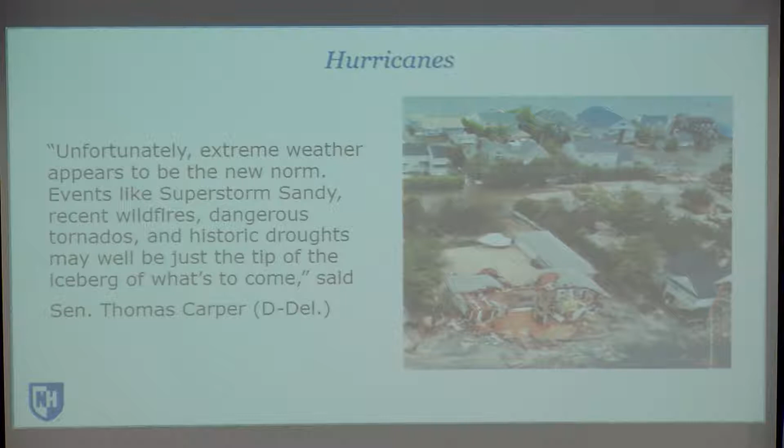Hurricanes, not something that in Costa Rica you've had to deal with, but most recently you've had a hurricane that hit the northern part of the country. We're seeing more frequent hurricanes, higher intensity hurricanes. So as a community, in terms of dealing with these extreme events, we're going to need to start thinking more about how we handle these. How do we build in resiliency to our infrastructure system so we can recover quickly after these types of events? And it's not just on the high temperature side, also on the low temperature side, especially in areas of the country where we don't necessarily see a lot of snow or cold temperatures.

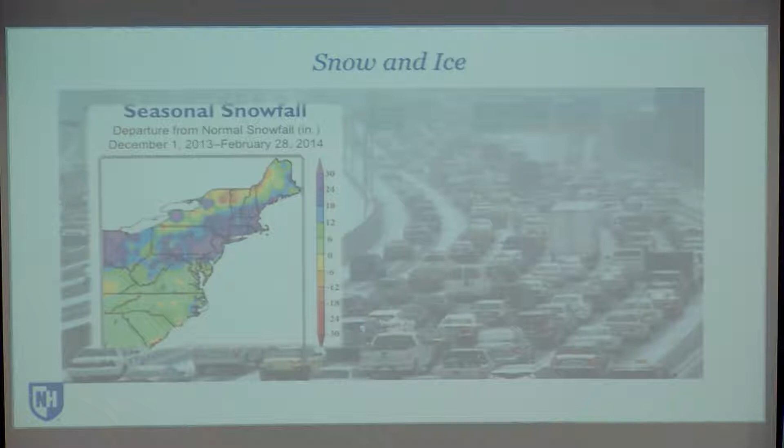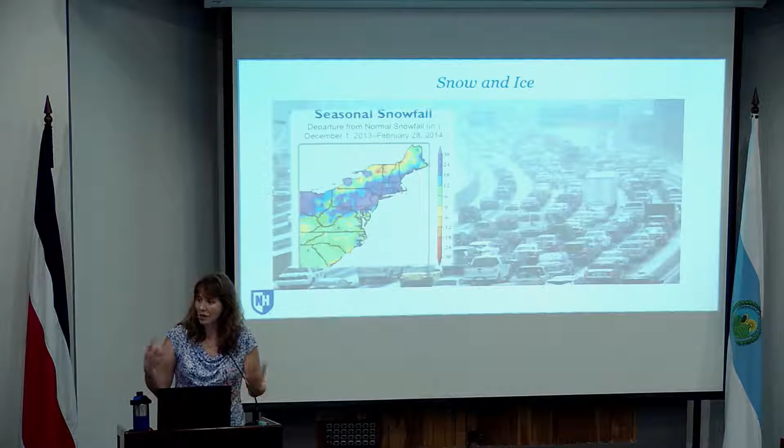There's been examples in recent years, like Atlanta, where they just didn't have a good way of handling emergency response to a big ice storm. In New England, we deal a lot with snow, we can handle snow. But a couple years ago, we had average snowfalls over 3 feet, more than what we're normally used to handling. So while we can handle large storms, having large storms one after the other was something we couldn't handle. It was very difficult to deal with. So it's not just specific one-time events, sometimes it's those smaller repeated events that start to add up, and you need to figure out what strategies to use to deal with those.

In terms of precipitation, a lot of areas in the United States we're seeing not just overall increases in the amount of precipitation, but we're getting roughly the same amount annually, just in more frequent, shorter duration storms. So we're seeing heavier, more frequent events. That leads to a lot of different types of challenges in terms of dealing with stormwater and flooding. And a lot of areas around the world are dealing with similar challenges. You can see, on a yearly basis, lots of examples of record flooding or unexpected flooding happening around the world.

And again, as infrastructure engineers, we've got to figure out how we're going to deal with this. How do you design your infrastructure to handle these types of events and to recover from them? And how do you do that? How do you figure out the adaptation?

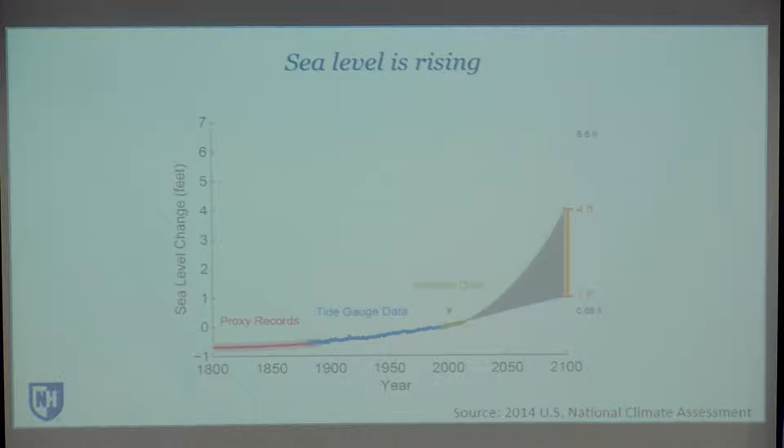So that's in terms of weather, but then we've also got the challenge, especially in coastal areas, of rising sea levels. This is showing some data for the New England coastline in terms of how sea levels have been measured to be changing over time. You can see proxy records, tidal gauge data from the last a little over 100 years, satellite data from more recently, and then the projected sea level ranges. Those projections have a range based on different types of emission scenarios and what we think might be happening as we continue into the future. For coastal New England, they've been projecting somewhere 1 to 4 feet of sea level rise by the end of the century, with a high of 6.6 feet.

Just recently, they've been talking about how conservative those numbers actually are, and it could be 10 or more feet that we could be seeing by the end of the century. Okay, so significant changes that we need to start dealing with.

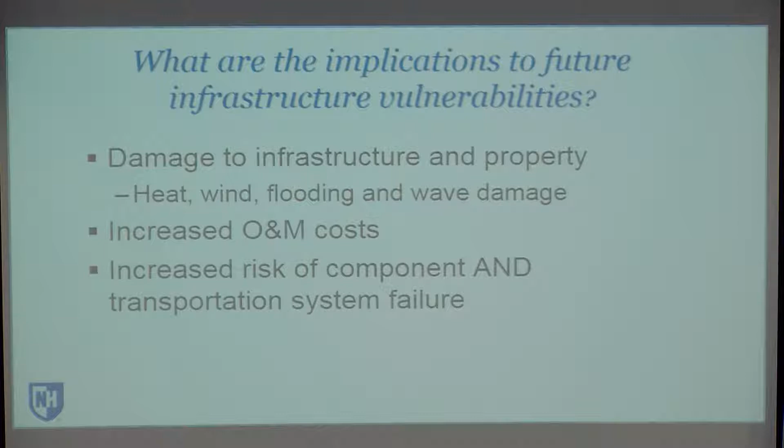So in terms of the implications to future infrastructure, really we're looking at damage to those infrastructure components from the heat, from wind, from flooding, wave damage when you're talking about the coast. In terms of overall day-to-day changes, expecting increased operation and maintenance costs, and an overall increase of not just component failure, but system failure. Being able to build in those redundancies, come at it with an adaptation approach, a holistic look at making sure we're preparing and being flexible for what future conditions could be.

So in that respect, at UNH, we've been working to try to get folks around this idea. About 6 years ago, we formed the Infrastructure and Climate Network, or ICNet. This is a collaborative network of over 75 climate scientists and transportation engineers in the Northeast. We've brought together engineers, scientists, and agency folks from the region to look at what challenges we're facing and how we deal with this problem. And it's not just about infrastructure engineers being able to adapt to certain climate information, but really understanding what is the variability, what's the uncertainty in some of those climate projections, and how we should best use them in the engineering design.

And on the flip side, getting the climate scientists to understand what it is that engineers use or need from the climate output. There's been a lot of communication, a lot of networking, and really what we've been able to do is accelerate new research and adaptation in climate change impacts across the Northeast with respect to transportation infrastructure. So that's the network side of things.

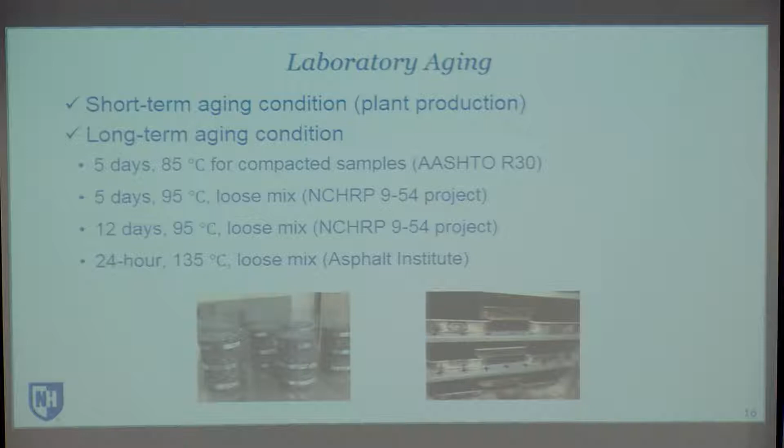We also looked at 24 hours, 135 degrees aging on the loose mix coming out of Asphalt Institute recommendations. So we wanted to evaluate these different approaches to see if there's similarities or differences in terms of the properties we're measuring.

In terms of testing conducted, we're looking at both binder testing and mixture testing. Most of the binder testing was extracted and recovered from the mixtures. In cases where we were able to get the tank material from the plant, we also did testing on the tank asphalt, mostly looking at PG grading, going through the typical PG grading protocol with the DSR and bending beam rheometer. More recently, we've been using the 4mm DSR protocol to fully characterize the material over a wide range of temperatures without having to do BBR testing.

For mixture testing, we're looking at complex modulus to establish the viscoelastic or rheological properties of the material, and also the simplified viscoelastic continuum damage approach for direct tension cyclic fatigue testing, the disc-shaped compact tension test for low temperature fracture, and the semicircular bend test for intermediate temperature fracture parameters. We're focusing on cracking because that's the primary concern in New Hampshire.

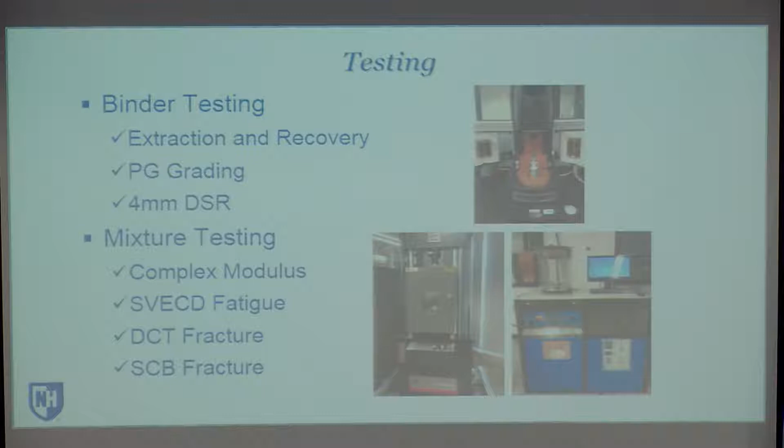A little bit more detail on the binder testing. PG grading, I think everybody's familiar with. The other parameter that we've been looking at for the binder side of things is the delta TCR value.

It's the difference in the temperature at which it meets the BBR stiffness criteria of 300 megapascal and the temperature at which the material meets the low temperature slope, or M value, which is 0.3. So the difference between those two temperatures has been established through the literature from work done at Asphalt Institute, that if that value is

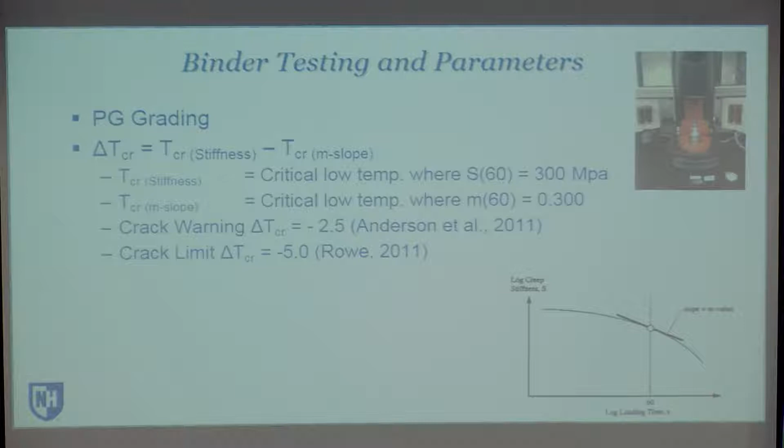above negative 2.5, that's an indication that there might be concern for some cracking. If it's above negative 5, that's more of a warning limit. So we're using those relative thresholds to evaluate the different binders.

It's really looking at this parameter, looking at the stiffness versus the relaxation capacity. And as that delta TCR becomes more negative, really what that's indicating is you're losing the relaxation capacity, which means you're more prone to cracking.

In terms of the mixture testing parameters, for complex modulus, again, similar to complex modulus for binders, we're looking at stiffness and phase angle.

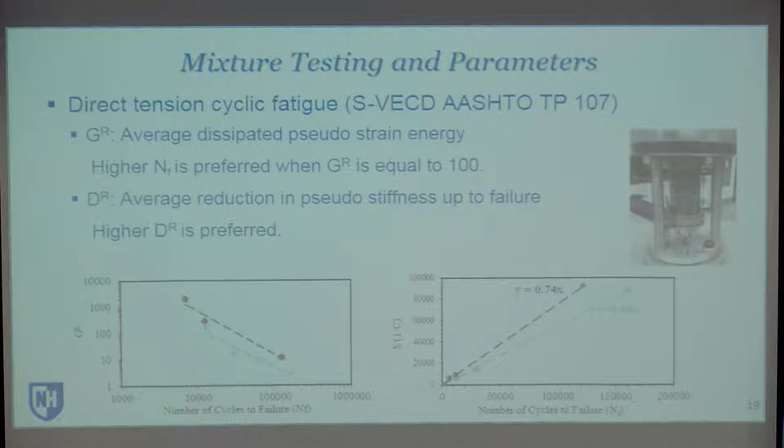And then for the direct tension cyclic fatigue, for the S-VECD approach, there's a couple different parameters that we're looking at. One is the average dissipated pseudostrain energy and looking at how that's changing with the number of cycles to failure. And then more recently, we've moved to the newer protocol or newer parameter that they've identified, which is the average reduction in pseudostiffness up to failure.

So if you're looking at the GR parameter, a higher number of cycles to failure at a GR value of 100 is preferred. And for the DR parameter, just remember that the higher that DR value is, the more resistant your material is predicted to be to cracking.

For the disc-shaped compact tension test, we're following the standard protocols, the ASTM standard, and the testing is done at 10 degrees above the low temperature at which the material is expected to be placed in the field. So that test is conducted at different temperatures depending on the location that the material is going to be in the field.

And the parameter that we're looking at there is what's called the fracture strain tolerance. The fracture strain tolerance takes the work, basically the area under your curve. If you look at the load displacement curve, which is then normalized by your fracture surface area, and then that normalizes that value by the fracture strength, looking at that peak value that you're seeing in terms of the load.

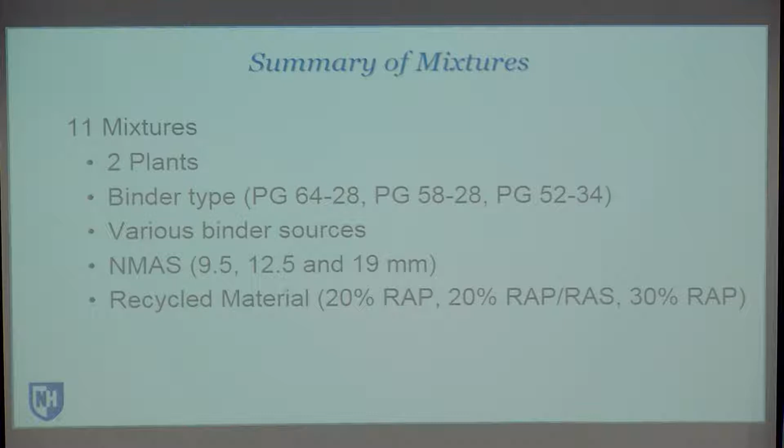Starting into some of the results from the first DOT test, looking at that correlation between those laboratory and plant-produced mixtures. This study incorporated 11 different mixtures, looking at production that was happening at 2 different plants, recognizing that different plants will operate differently.

Looking at various binder types, so we've got a range of the most common binders, PG grade binders that are used in New Hampshire. Also looked at the impact of binder source, recognizing that if we're looking at aging and what's happening in the lab versus what's in the plant, the source of the binder could have a significant difference because of the differences in chemistry.

So we looked at several different binder sources for some of these, different aggregate gradations, relatively fine to relatively coarse mixtures, and then looked at different recycled material components. So from 20% RAP by total weight of the mix up to 30%, and then also 20% combination of recycled asphalt pavement and recycled shingles.

Now, this is the first time that New Hampshire DOT had actually produced mixture and put it down in a state project with shingles. So this was kind of a big deal.

All right, let's get into some of the binder results. We'll start by looking at the performance grades, and this is the high temperature PG grade.

The shingles used in this project were too stiff to be graded, so we don't have that information - or I should say, too stiff to be graded with the equipment that New Hampshire DOT or any of the contractors had, so we couldn't do that.

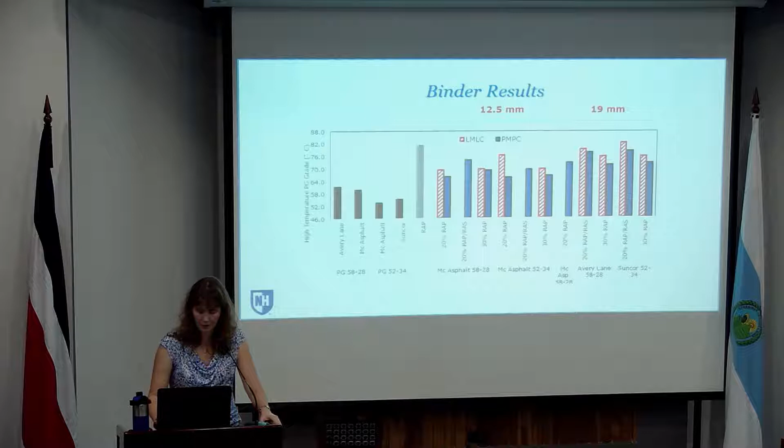In terms of the RAP, you can see New England doesn't have super stiff RAP - if you noticed, on the high side it was an 82, and on the low side we're looking at around a minus 18.

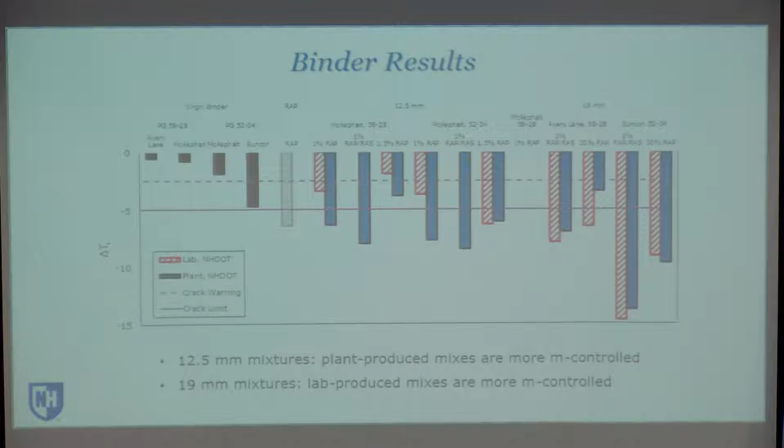The one that does stand out is that Suncor binder. That Suncor binder, as the virgin binder itself, if you looked at the delta TCR, identified itself as being a problematic material. Turns out that material did have REOB in it, not a surprise after we actually went through the testing.

So REOB, I don't know, do you guys deal with REOB? Not so much, okay, so just a quick explanation. REOB is re-refined engine oil bottom. So essentially when motor oil is recycled and refined and used, the residual left over at the end can be used, and has been used relatively frequently depending on the area of the country, as an additive to asphalt binders, specifically some of the softer binders, to get them to meet the PG grade. That was identified, I don't know, about 10 years ago as potentially problematic. A lot of work went into identifying the presence of this material, which is relatively easy to fingerprint because of the heavy metals that end up in the material.

But what it's shown to do is when it ages, it'll meet the requirements in terms of the PG grading, but then when you look at how that material ages, and also when you look at something like the delta TCR, you're losing that relaxation capacity relatively quickly with that material. So those tend to be materials that you observe relatively early-in-life cracking issues with. And we have seen that in the field as well with some of the field mixtures. Those materials shown to have REOB at certain percentages did show earlier cracking in the field as compared to other materials.

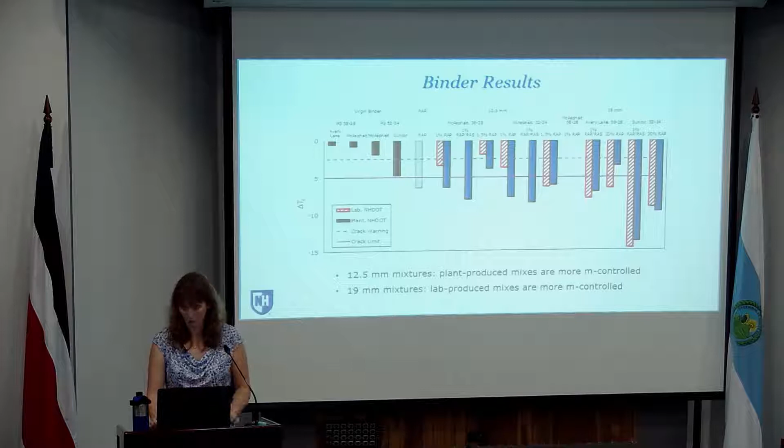And this was a statistically significant difference. So that means if you're looking at these materials and putting them into some type of performance prediction model, that could have a significant impact on the level of distress that you predict, because of how you actually fabricated the specimen and the protocol that you used to do that. For some mixtures, it didn't matter. And so really what came out of this project was an 'it depends' answer. There wasn't a consistent trend in terms of different types of recycled materials, different types of binders, grade, or source.

So this is what led into the next project. We're not going to be able to specifically say if you do this in the lab versus the plant, there's a specific offset that happens. Really what we need to do is focus on what's happening in the field and how do we most appropriately simulate that in the laboratory, so we've got the best possible information for what's going to be happening. And so that led into the next project.

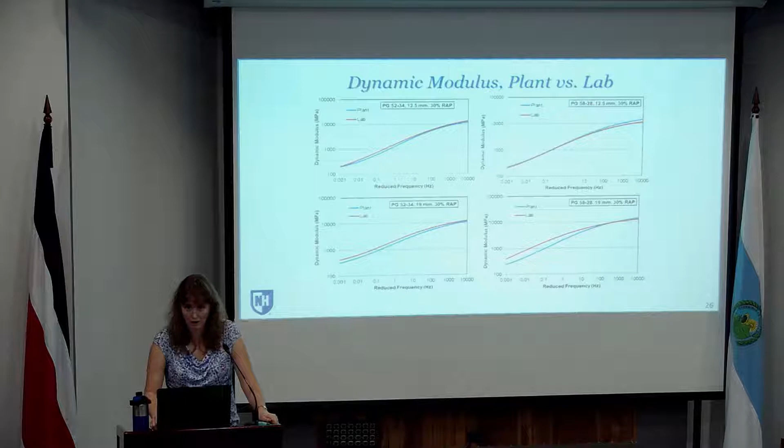So this project, we used some of the same mixtures. Also, I should note that as a result of this first project, there were some issues with the shingles mixtures and with some of the other results that we've got. So New Hampshire DOT, those were the first and last shingles mixtures that were put down in the state for a state project.

So moving on to this next project, we're focusing on surface mixtures, because we're looking at aging, so we're most concerned with those surface mixtures, at least initially. So we used our surface mixtures that just had recycled asphalt pavement, just the RAP from that initial project, because we do have field sections that we can look at over time, and then added some more common mixtures that are used in the state.

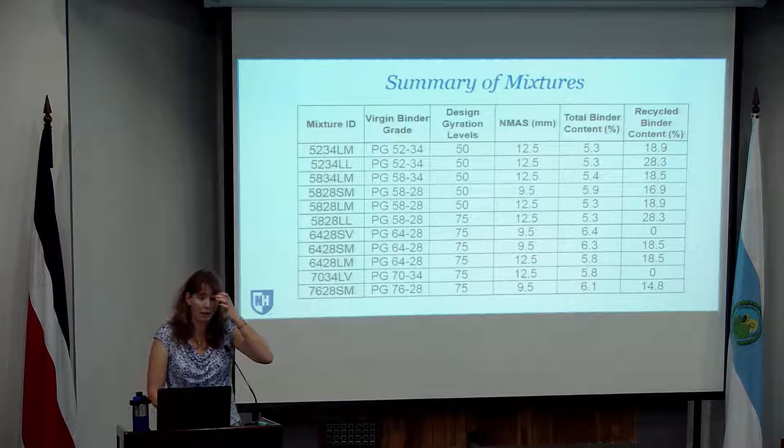So you can see we've got, again, a range of asphalt binders. In this project, we added different design gyration levels, so different types of mixtures for different tiers of roadways, more of the 12.5 and 9.5 millimeter mixtures, and then a range of recycled binder contents. We also included a couple virgin mixtures and a couple of the specialty mixtures that New Hampshire DOT is using a lot more for some of the specific applications. So we've got a 70-34 and also a 76-28, and these are polymer modified materials.

Just a couple of examples. So I'm going to go through some sample plots here, and these are for one representative mix. I'm not going to show you the results from all of the mix because the general conclusions and the general trends that we saw for all the mixtures were very similar. So the data that you're going to see is from one of the PG52-34 mixtures. It was a 12.5 millimeter, 30% RAP.

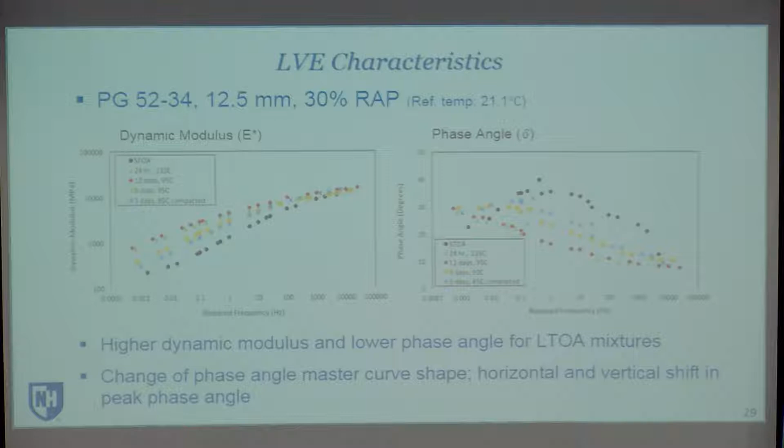So you can see here in these plots, we've got the dynamic modulus and the phase angle master curves, and you can see the short-term age. So again, these are all plant-produced mixtures, not laboratory-produced mixtures. For this part of the project, it was all plant-produced mixtures. So the short-term condition, which is the black dots, those were the mixtures that were sampled right out of the plant. They were reheated for the purposes of fabricating specimens, but no additional conditioning was done.

And then the blue X's, those are the materials that were compacted and then aged in a compacted state for 5 days. Then we've got the yellow points, those were the 5 days of aging in the loose condition at 95 degrees C, which were then compacted. And then the red is the 12 days at 95 degrees C in the loose condition, and then the green is the 24-hour at 135 degrees C in the loose condition.

So for the dynamic modulus curves, you can see not unexpectedly, as you increase the aging level or increase the amount of laboratory conditioning that's done, you've got an increase in stiffness. And we did see that the 5 days aging compacted and the 5 days loose, very similar results in terms of the stiffness. Statistically speaking, we couldn't say that there was a difference between those two. Also interesting that the 12 days at 95 degrees C were statistically similar to the 24 hours at 135.

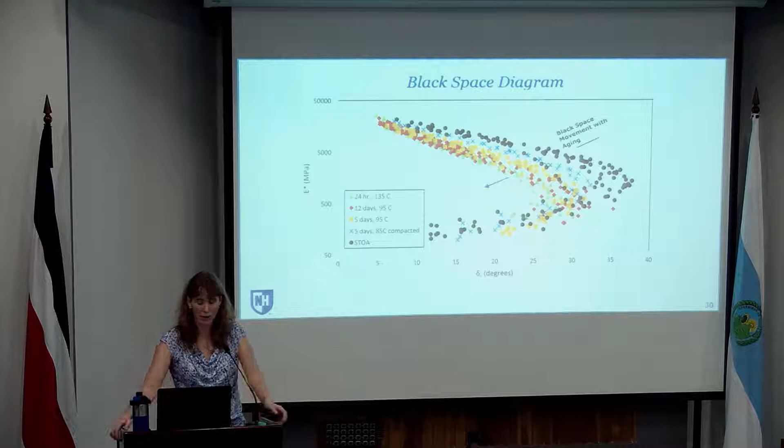You can also look at these in black space, which is really cross-plotting the stiffness with the phase angle. That gives you a little bit of a different picture where you can look at the combined effects of the stiffness and that relaxation capacity. Again, you're seeing the same thing, where you're seeing a decrease in your phase angle and the shift in where that peak occurs, as well as an increased stiffness with the different aging. So it's just a different way of looking at it.

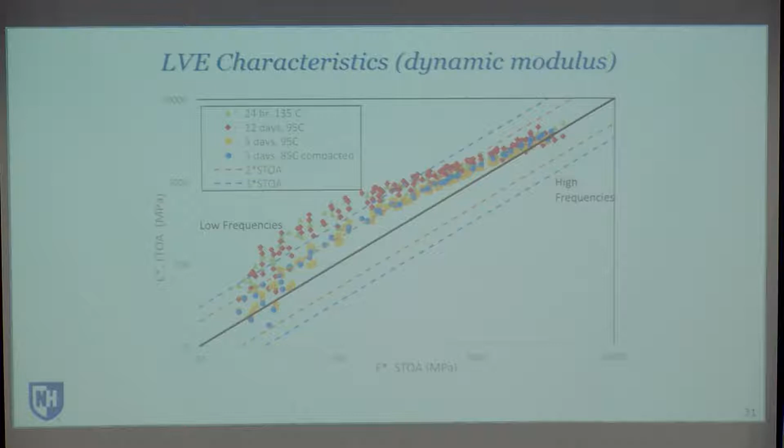You can also look at the impact of aging as a function of how it changes, or how different long-term aging protocols compare to the short-term aging condition. So this figure is showing the dynamic modulus, or stiffness, from the short-term aging condition on the horizontal axis, and the stiffness at each long-term aging condition on the vertical axis.

You can see at the low frequencies and at the high frequencies - low frequencies on the lower left, high frequency on the upper right - there's not as much impact of the longer term aging protocols in terms of changing the stiffness. When you get into those mid-range frequencies, you can see changes in stiffness of 2, 3, 4 or more times.

So really where we're seeing that change in the rheology is in those mid-frequencies, which is typically where we're seeing most of the range of performance in the field. So it is something that we need to pay attention to.

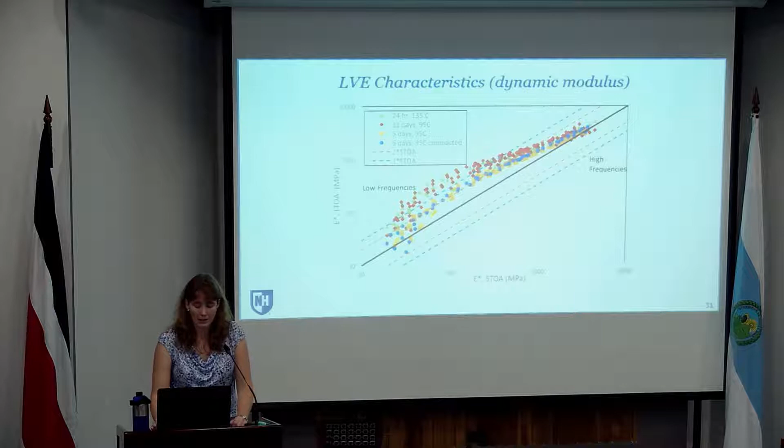is aged. Now, the other thing we were able to do, because we had those materials placed in the field from the original project, is go out and get cores in the second project once the materials had been in place experiencing actual field aging conditions for about 4 years worth of time. Obviously as we continue the project we're going to continue to do this, but this is the first set of data.

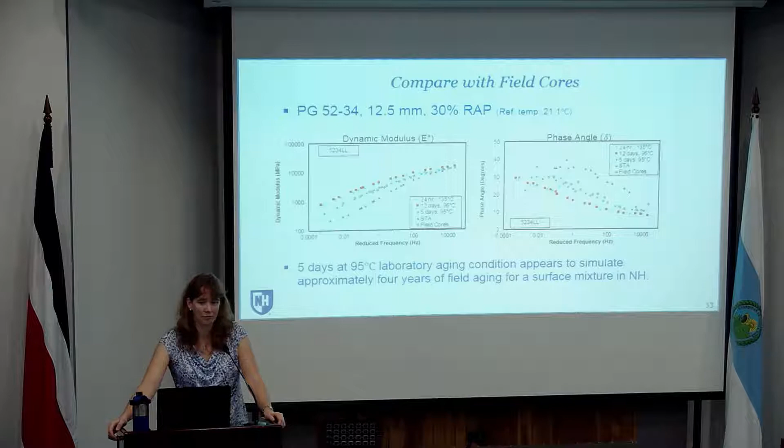Same mixture here, looking at the results of the field core testing, again focusing on the surface mixture. Those mixtures that had been out in the field for about 4 years, when we look at the viscoelastic characterization at the end of that time, they're roughly equivalent to 5 days of aging. So that was interesting to see - 5 days at 95 degrees C roughly simulated what those mixtures were experiencing in New Hampshire conditions over the first 4 years of their life, with respect to both the dynamic modulus and the phase angle.

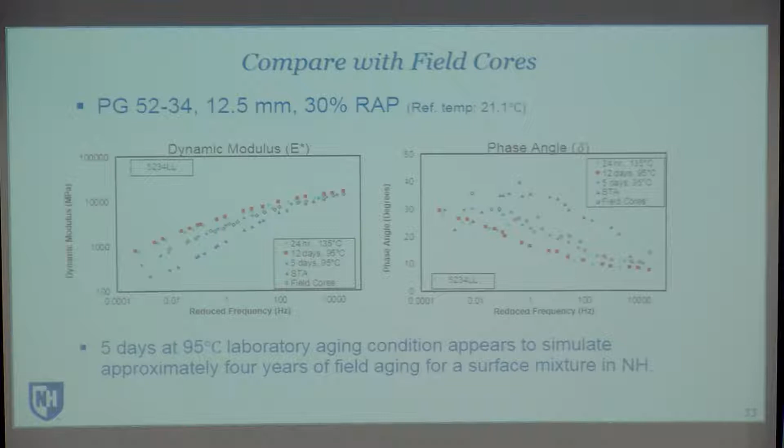So we took this a little bit further with some of the work that was done in the NCHRP 09-54 project, to look at what were the appropriate aging durations at that 95 degrees C that best reflect the time and conditions at particular locations across the United States.

So they developed what they called a climate aging index. We applied that to our conditions to see, with this climate aging index, what is the appropriate depth, or what depth are we really simulating. We know the time because we've got the cores from 4 years, but what's that reflecting in terms of the depth according to this model they developed and calibrated. It's a national calibration, but at least looking at comparatively where do we fall.

So looking at this for the 5 days of aging, it looks like the appropriate depth we're simulating is 4.3 millimeters from the surface. And the 12 days is simulating 9.6 years. So that's what we're trying to do - based on that 4 years, establish what the depth is, and then based on that same depth, if we're doing 5 days and then 12 days, what is that 12 days relatively speaking doing in terms of time in the field. So we've got some feel for: 5 days gives us 4 years, and if we do 12 days, that gets us a little bit more than double the time in the field. We're going to continue to evaluate this over time.

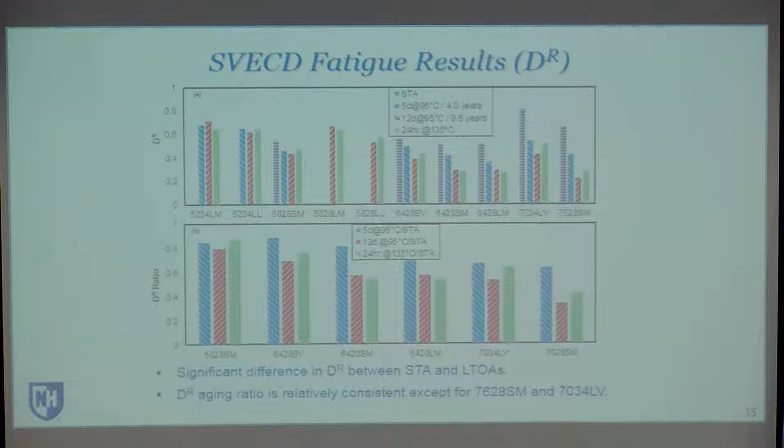So we'll start with the fatigue results. This DR parameter - all you need to remember for this project is the higher the number, the better, so we're looking for higher values. The way these plots are set up, we've got the individual mixtures along the bottom, and the short-term condition is purple, 5 days is blue, 12 days is red, and the 24-hour condition is green. You'll notice we don't have all of the conditions for all of the different mixtures.

At this point, we started to be a little bit more efficient about which mixtures were tested under which conditions. Some of the early mixtures, we didn't have any more short-term or plant material to test in this particular project. So the top figure and the bottom figure, we're looking at the ratio between the long-term age condition and the short-term age condition, looking at how much or what percentage change or loss we see with those longer-term aging levels, and how that's different from mix to mix.

You can see, in general, we're seeing a decrease in that DR value with aging, not unexpected, right? What we'd anticipate happening as the material ages is it becomes more susceptible to cracking. Now the one thing that's interesting here is, remember when we were looking at the viscoelastic material response, the 12 days and the 24 hours were pretty much the same, statistically the same for that viscoelastic response.

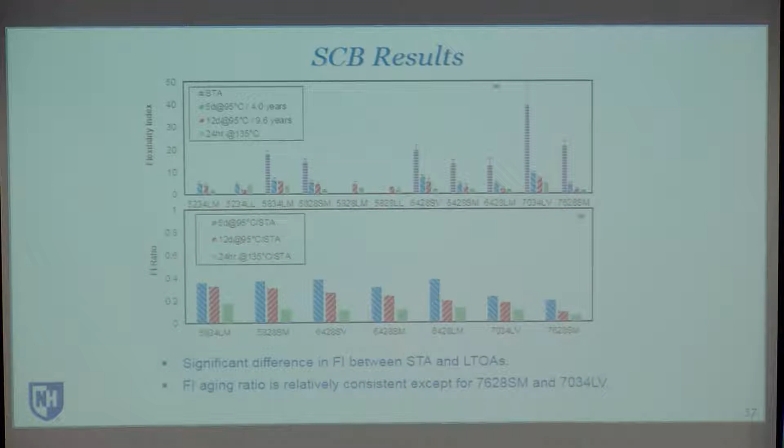Moving on to the semicircular bend test results. Same type of figures here with the flexibility index values shown in the top figure. These are the actual values from the test results, and you can see those polymer modified mixtures have huge FI values. If you've looked at SCB results, typically any flexibility index value of 10 or above is considered pretty good, and we're looking at numbers around 40 for these mixtures in the short-term age condition.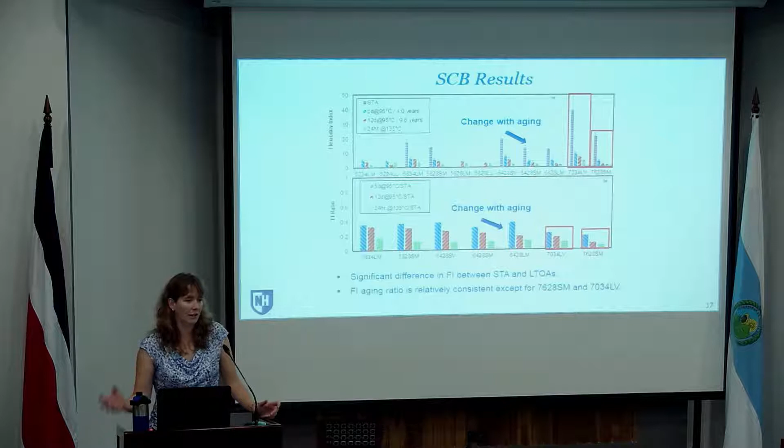Then you look at the bottom figure, and again we're looking at the ratio. You can see with the SCB and aging, we're getting a pretty big drop in the flexibility index results. You're seeing the change with aging, and different behavior with those polymer modified materials than with the others. But still, if you look at the actual flexibility index values after aging, they're still higher than a lot of the traditional mixtures. So even though you're seeing a higher drop, in the end they're still better.

And then finally, the DCT results - I'll go through these a little quicker. Same kind of conclusions here in terms of the change with aging; you're not seeing as much change in the ratio for the DCT at the lower testing temperatures, the fracture intermediate temperature versus the low temperature, but similar trends, and again similar differences in the properties we're measuring from the polymer modified mixtures versus the regular mixtures. But still, even with the DCT, after aging these are still showing to be better materials.

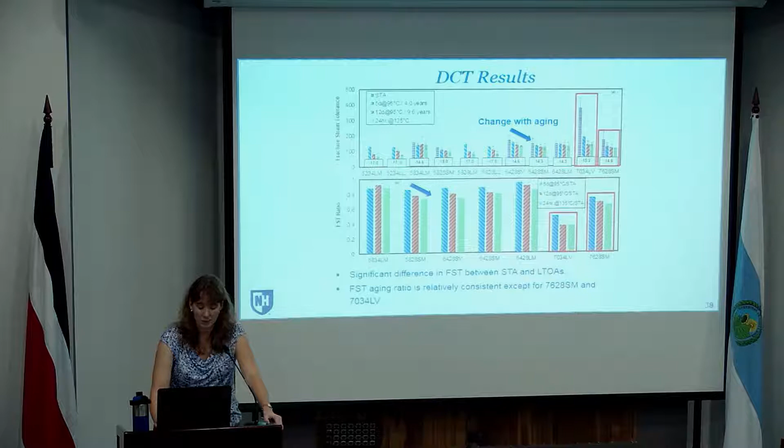So that's all the mixture testing. Ongoing work we're performing right now in the laboratory is looking at binder testing on extracted and recovered materials from these different mixtures, looking at the different aging levels as well. In terms of the 4mm DSR testing, that allows us to do the wider range in terms of the viscoelastic characterization for the different binders.

Here's an example of some of the results we're getting. Same mixture, seeing the same kind of trends we saw with the mixture testing, where the viscoelastic response of the 12-day and 24-hour aging conditions are statistically similar, and the 5-day is kind of at that midpoint. We're seeing the same thing in the stiffness as well as the phase angle.

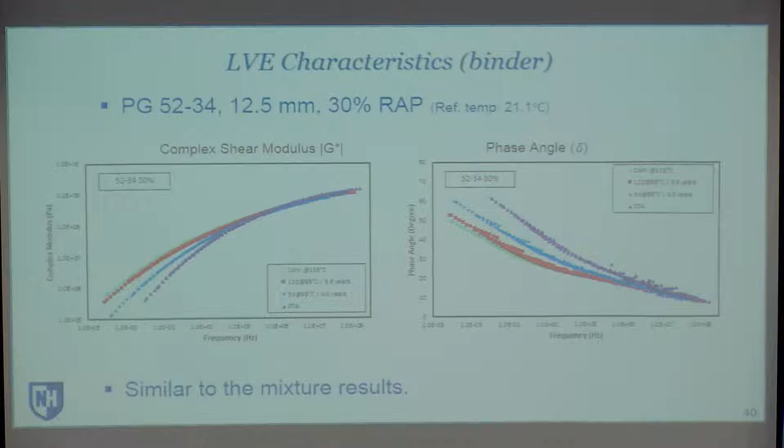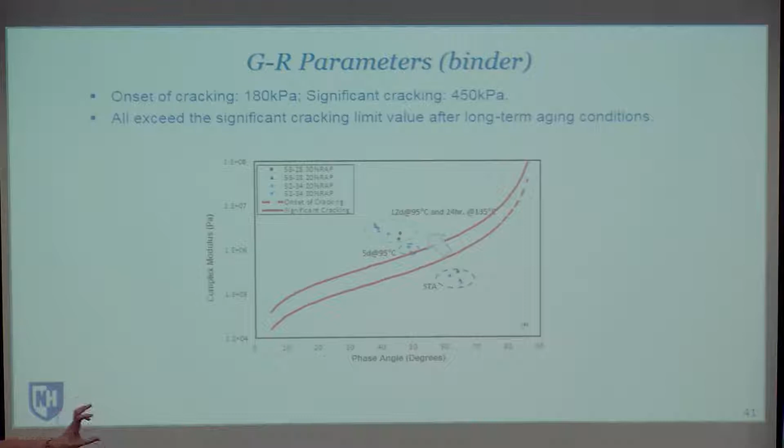We can do the same thing looking at black space, looking at the Glover-Rowe parameter. This is looking at a particular temperature-frequency combination, one point, plotting it in terms of complex modulus versus phase angle, and comparing this to some established thresholds to see how those materials are changing as a function of aging. From the short-term aging, we're in the zone where we expect good performance from these materials, and as we age the materials, they're moving through to the point where they're beyond the thresholds established for significant cracking limits. So just something to start thinking about in terms of what's happening with these materials over time. Again, this is ongoing work, so we don't have a lot of conclusions in terms of the different materials as of yet.

So just a summary from what we've talked about: the complex modulus, the SCB and DCT fracture tests, the fatigue tests, as well as some of the approaches of taking those test results and putting them into a pavement performance evaluation and simulation can be used to track what's happening with aging.

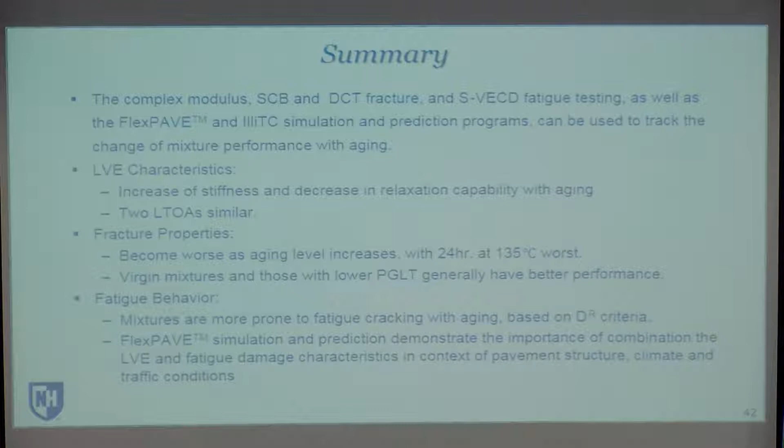In terms of the linear viscoelastic characteristics, as expected, we're seeing an increase in stiffness and decrease in relaxation capacity, and the two long-term aging conditions, 12 days at 95°C and 135°C for 24 hours, show similar results in terms of viscoelastic characterization. So for your mixture, if all you care about is that viscoelastic characterization, you can do the faster aging protocol. It's giving you the same results.

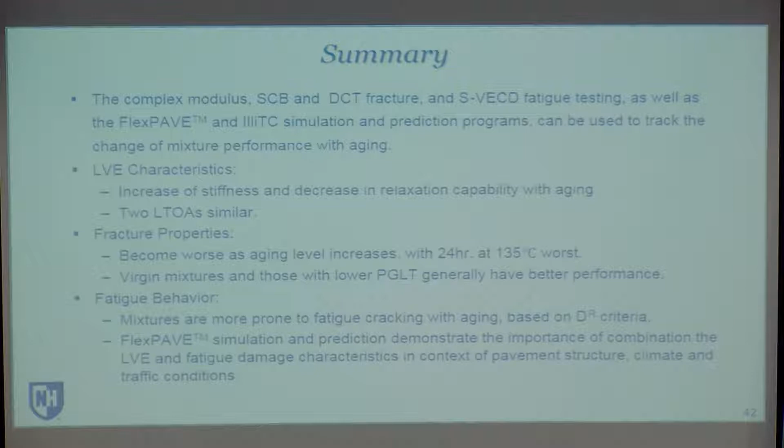For fracture and fatigue properties, you've got to be careful about what's happening with those longer-term aging levels. You're getting differences in the properties measured at the two different conditioning procedures, and it's not consistent—we can't say one is always more conservative than the other. It changes from mix to mix, and also depends on whether you're looking at the fatigue approach, the fracture approach, and what test temperature you're evaluating. So that really comes back to what's most representative of what we see in terms of changes in the field, and that's part of what we're looking at moving into the future.

Future work that's ongoing and planned includes additional binder testing, and additional testing and analysis of cores as those materials age in the field. The ultimate goal is to develop an aging prediction model and thresholds that the DOT can use to screen their materials, and also to do actual performance prediction over time, including pavement life cycle analysis with the effect of aging.

Before I move on to the next project, just a couple of acknowledgements. The two Ph.D. students who have done most of this work: Runhua Zhang, the current Ph.D. student working on the aging project, in the middle of conducting all the binder testing. And Reyhaneh Rahbar-Rastegar, a Ph.D. student who graduated about 1.5 years ago—she started on the original DOT project and started the aging project. Those two are really responsible for most of what I showed you today. And I also can't forget to acknowledge the New Hampshire DOT and contractors and other collaborators who worked with us through this project.

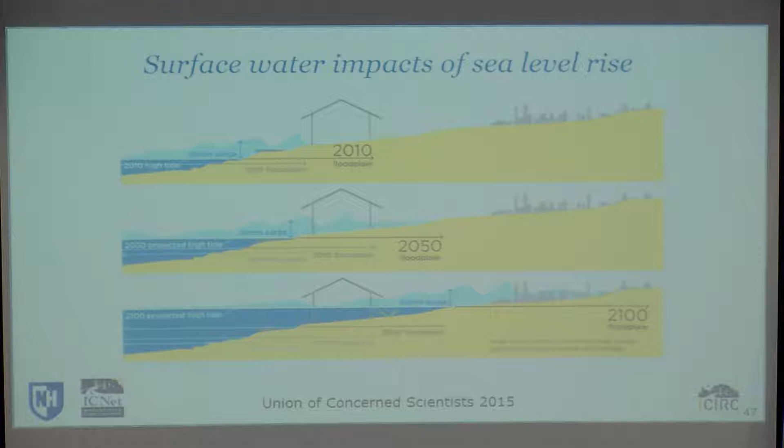Most commonly, when people talk about sea level rise, they're thinking mostly about surface water. So what this figure is showing is a line down here that shows 1880, for example, where the sea level was and where the floodplain extended to looking inland. Go forward 130 years, right?

2010 high tide, now a little bit more, okay? And so our floodplain has extended inland. Now when we add storm surge on top of that, you can see the extent of where that's going to happen. As we start looking into the future, with increased sea levels, you're going to have increased storm surge, increased surface water flooding.

So that's the surface water inundation. We can understand that, and we know there's some uncertainty in terms of where those levels are going to be. But one of the things that really hasn't been done is what's happening underground. So we're looking at surface inundation, but when you've got rising sea level, you also have rising groundwater.

The way the hydraulics work is that groundwater table has to come and match with your sea level. So as your sea level is rising, your groundwater is rising as well. And it's not something that's just happening immediately on the coast, it extends inland a certain amount based on hydrologic and geologic conditions. So you might be a couple kilometers from the coast thinking sea level rise isn't going to be a problem because you don't get surface inundation that far, but you've got groundwater rising that you're not necessarily seeing unless you're paying attention to it.

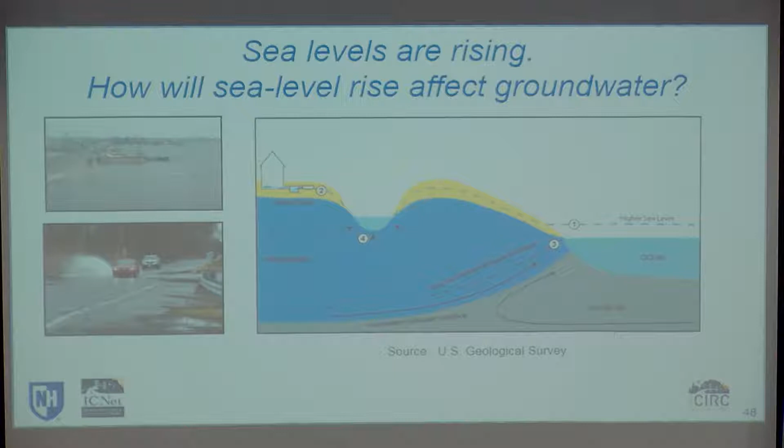And that's got implications well beyond roads. We're looking specifically at implications on roadways, but it's got a lot of implications on septic systems. In New England, we've got mostly rural areas, so septic systems are common. Also water supply, because not only are you getting the rising groundwater table, you're getting that saltwater, freshwater interface changing. So that's a big deal.

Wetland considerations - you've got some areas where all of a sudden the wetlands are larger, which has a huge impact on zoning. Some areas that aren't wetlands now will become wetlands. Hazardous waste sites, all kinds of implications. So that's what we're looking at now, recognizing we've got sea level rise, but then projecting how that's going to impact our groundwater.

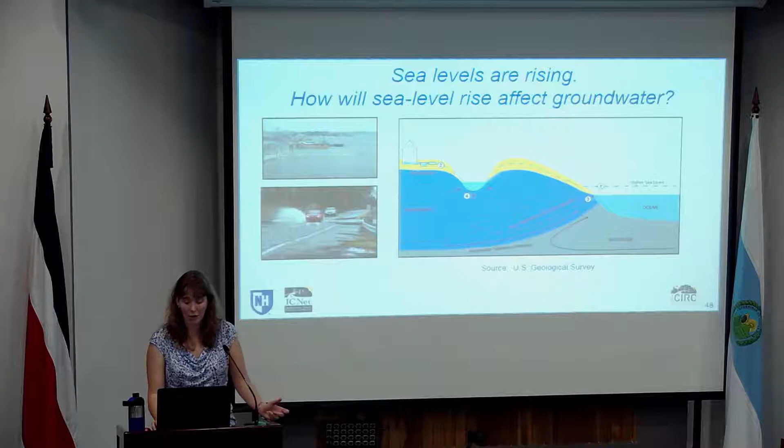Now there have been studies where they've actually recorded groundwater rise. This particular study was conducted in Cape Cod, that little arm of Massachusetts, not far from us in New Hampshire. They had a well right near the tip, in the middle of the peninsula, and they were looking at records over time. These records go back to the 1950s, and they were seeing on average a 2.1 millimeter rise in the groundwater table over that time. If you look at the tidal gauges in the Boston area over the same time frame, we're seeing a 2.5 millimeter rise in sea level, and a corresponding increase in the groundwater table.

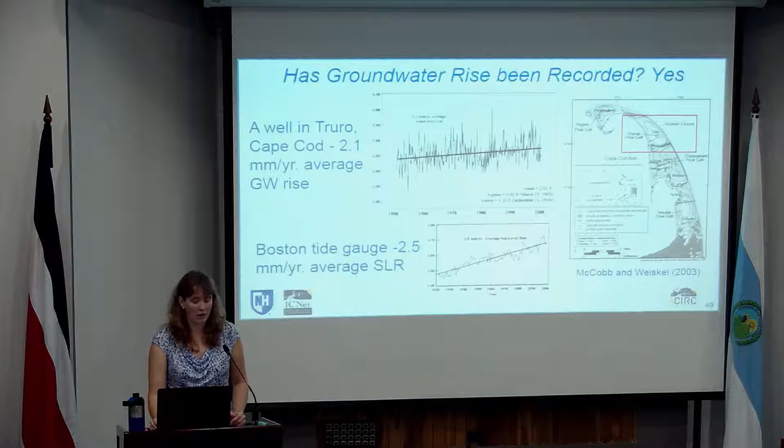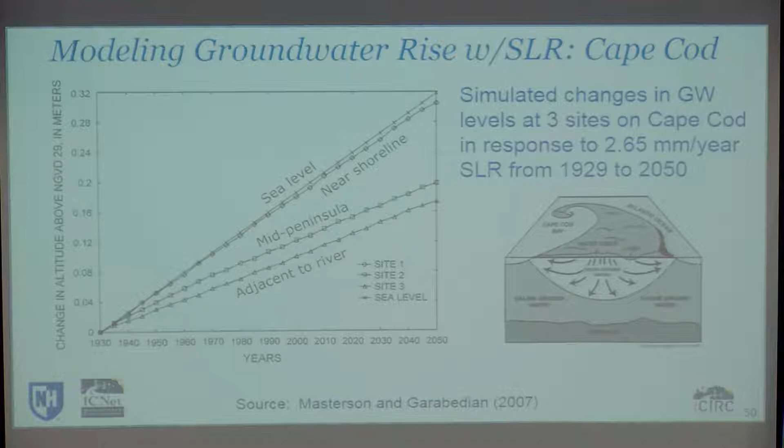This particular project went through the process of actually modeling the groundwater rise with sea level rise and established that near the coast, groundwater table can be expected to rise pretty much the same as sea level. As you get further inland, mid-peninsula, you've got differences, so it decreases. And if you're near a river, adjacent to it, which is basically another hydraulic boundary, the decrease is even more, because you've got that outlet for the water.

So the first step in this particular project is modeling the groundwater rise in New Hampshire. We're focusing on New Hampshire, which has a little tiny bit of coast, so we didn't have a lot of coastline to deal with. We're looking at the whole coastal area of New Hampshire. Here's a blow up - you can see there's a group of communities within range of the coast that's typically considered the coastal area of New Hampshire.

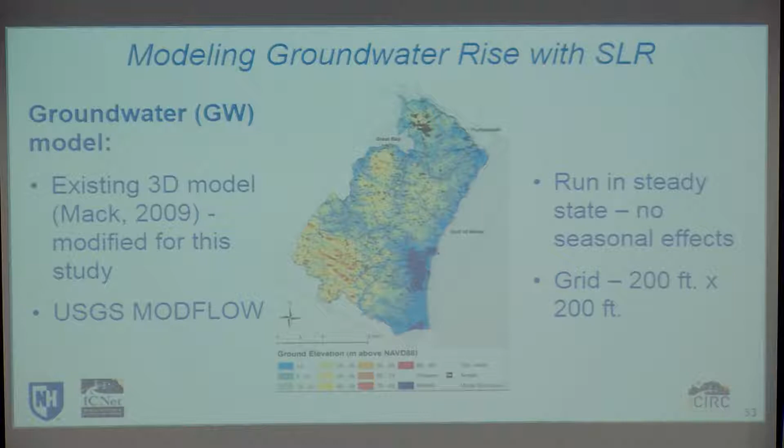So we looked at a groundwater model. Essentially what we did was take an existing groundwater model developed for a different purpose - really looking at drinking water, so much deeper - and modified it to look at what's happening nearer to the surface where we're intersecting with the pavement cross-section. This modification took a PhD student with significant groundwater modeling experience over a year to do. You can see all those little black dots - those are the observation wells she used, so a lot of data went into development of this groundwater model. One thing right now with the model is it's run in steady state, so we're not looking at seasonal variations yet - we will be, but this is looking at mean groundwater levels.

We took a scenario-based approach, looking at expected sea level rise scenarios at different magnitudes, from 1 foot of sea level rise, currently expected for the year 2030, all the way out to 6 feet, the worst case condition at the time we started the study, for end of century.

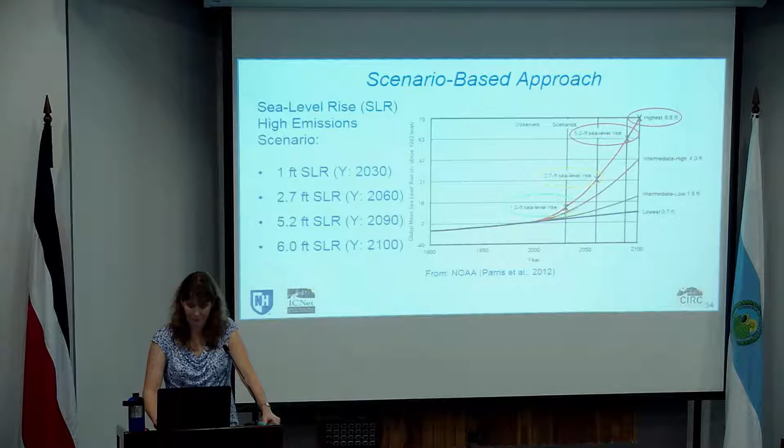These are some of the results, showing the groundwater rise zone. This shows the areas in the coast where the groundwater is expected to rise due to sea level rise.

This figure is normalized as a percent, so it's not for a particular scenario, but shows you as a percent of sea level rise what you can expect in terms of rise in the groundwater table. For the geological conditions in our coasts, we're seeing groundwater rise happening up to 4 to 5 kilometers inland, pretty far.

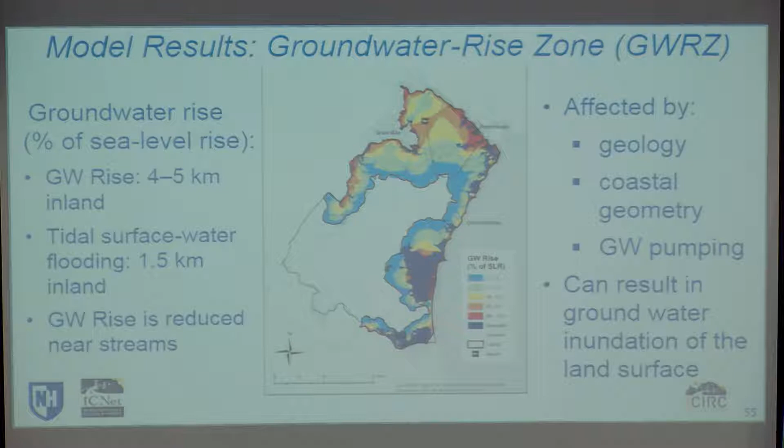If you looked at just the surface inundation, the extent for the same scenarios is only up to 1.5 kilometers. So a lot further inland, we're seeing the effects of groundwater rise.

We do see the reduction in groundwater rise near streams, again because of the hydraulics, but we also see the extent of that groundwater rise is affected by geology, by coastal geometry, and by where we've got groundwater pumping happening, since a lot of communities have community wells that impact it. So a lot of different conditions really illustrate that to evaluate what's happening, you have to have a groundwater model for your particular region.

There's not a one-size-fits-all answer saying if you're seeing sea level rise, you're going to expect this much groundwater rise. You've got to model the conditions.

When we start looking at applying this to road infrastructure, our main concern is as we get rising groundwaters, that groundwater table is going to start intersecting our pavement structure. We're building the pavement structure with the intent that it stays dry, right? That's the whole intent of our pavement structure.

We might have subgrade material where we've got that groundwater fluctuation, the seasonal fluctuation, but that water, except in flooding conditions, stays out of that pavement structure. Well, in areas where we've got roads where the groundwater table is already close to the surface, they are going to be vulnerable to groundwater rise as a result of sea level rise.

In some cases, there's pavement sections that at the higher sea level rise scenarios, you're actually going to have groundwater coming above the surface of the existing pavement right now. We're going to have to deal with it.

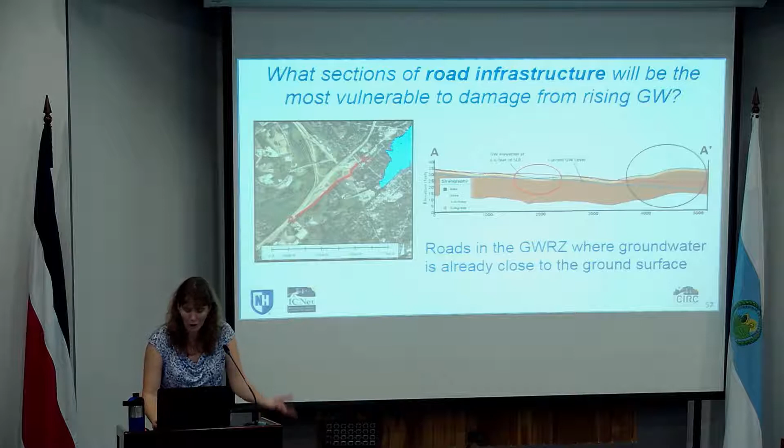So how do we identify that? First of all, identifying where those vulnerable sections of roadway are, by taking that groundwater model, overlaying the existing pavement network, the road network, and then identifying which roads are in those areas of concern.

The way we defined this was vulnerable roads were those that had groundwater table within 5 feet of the current pavement surface.

Then looking at the different types of roads, in this coastal area we've got turnpike, statewide corridors, regional corridors, local connector roads, and then local roads. You can see in terms of just the numbers, those local roads have a lot more miles that are going to be impacted, which is something that the municipalities are going to have to really start thinking about.

So it's not just something that has to be done at the state agency level, but a lot of times these vulnerable sections are going to be under the purview of towns and cities, which don't necessarily have the resources to deal with it.

The other thing we did: we identified all the vulnerable sections of roadway, and then looked at several sections to do case studies. I'm just going to show you 2 of the case studies now.

One is in the northern part of the coastal area, Gosling Road, and then the other one is in the southern part of it, which is Route 286.

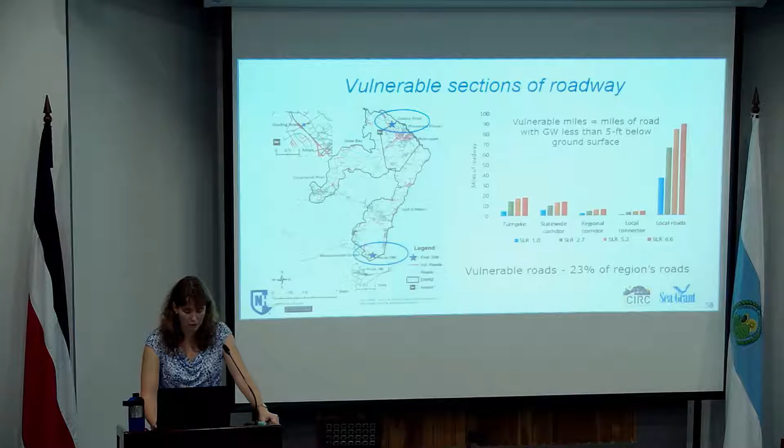Route 286 — this is just a picture of the actual specific site that we looked at. This is a regional corridor that connects the seacoast to the main interstate, so it's an evacuation route. It's a really important roadway, especially in emergency situations.

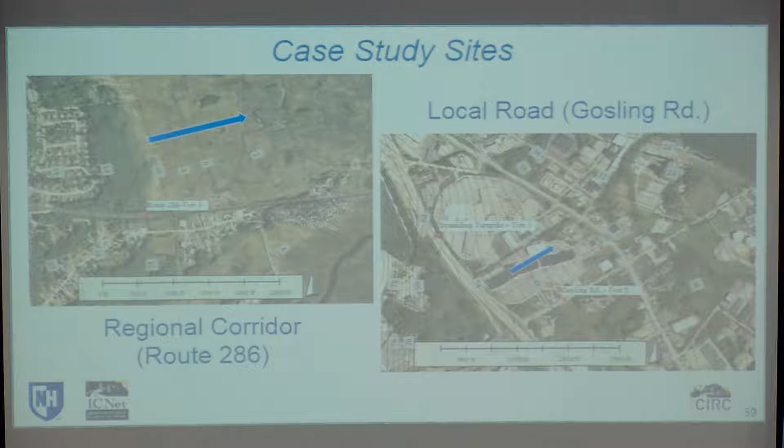Gosling Road is a local road, and the particular site is right next to where the mall is. So this has a lot of traffic, and it's not a road that's going to go away anytime soon. It's also very near an international trade port, so there's a lot of access to the international trade port along this road.

So the way we did this, we looked at a pavement evaluation, and to start off this project, we just looked at a simple layered elastic analysis, just trying to get a feel for what's happening before we dove in a little bit deeper. We got information from New Hampshire DOT on what the typical structures were for these two roadways, then looked at a typical truck tire, typical axle load, and from the layered elastic analysis, what's the tensile strain at the bottom of the asphalt layer, what's the compressive strain at the top of the subgrade.

We used the typical transfer functions that are out there for relating pavement performance, or number of cycles to failure, for the different distress criteria. In terms of how we defined or modeled the saturation of those unbound layers, if the material was above the water table, we used the optimum resilient modulus value. If it was below the water table, we used the saturated value from the pavement ME approach, which is basically half of that value. Again, rough estimate, gives us a feel for what to expect.

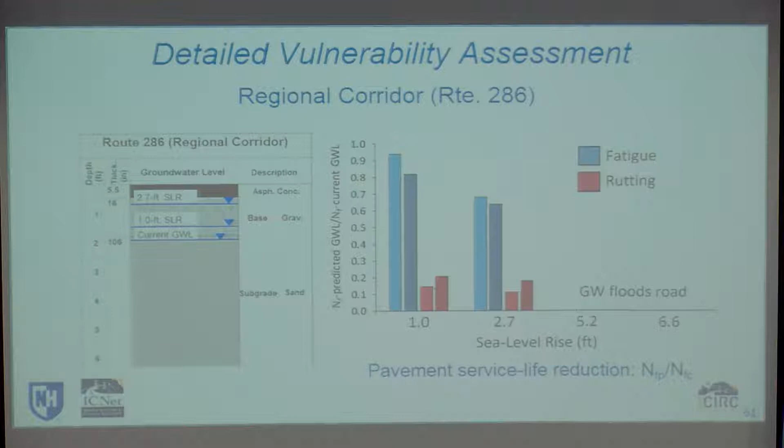So from this vulnerability assessment, for Route 286, you can see where the current groundwater level is, which is actually just below the level of the base, and then with 1 foot and 2.7 feet of sea level rise. We didn't do the other scenarios because once you've got 5.2 feet of sea level rise, that section of roadway is going to be underwater. Once you get to that point, that's it.

And then looking at the difference in the number of cycles for fatigue and rutting, you can see a big drop in the rutting performance of this cross-section versus the fatigue.

So from that gives us a rough estimate. We're able to do a little bit more in terms of the adaptation planning. So knowing this, how can we modify the structure to be resistant to those changes that we're expecting? Again, the first rough approach to this was really looking at changing layer thicknesses. So our choices are to change the base layer thickness or change the asphalt layer thickness.

So looking at the combinations of different thicknesses of base and asphalt layers, evaluating the costs, and making sure you've got those thicknesses that are giving you the performance that you need in terms of number of cycles to failure, and the appropriate roadway elevation to make sure it's not underwater. What are the most economical solutions? So we did this for a couple of the different sites.

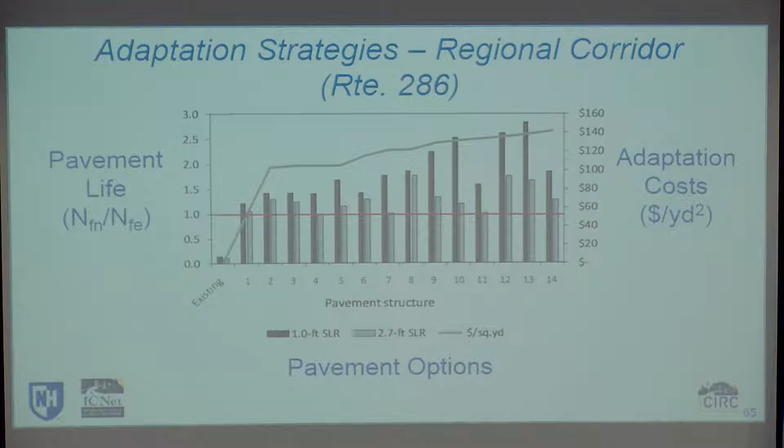I'll just quickly show you some of the data from the Route 286 results. These are different pavement structure combinations, but I just wanted to show you the approach we're using. This is the existing condition, and then this is evaluating different combinations of base and asphalt layer thicknesses, comparing those against the adaptation costs, and they were just ranked in order. So from this, you can look at what are the most efficient solutions in terms of the right combination of base and asphalt layer. Again, gives us an idea of what to expect in terms of how we can adapt some of those specific cross-sections to expected future conditions.

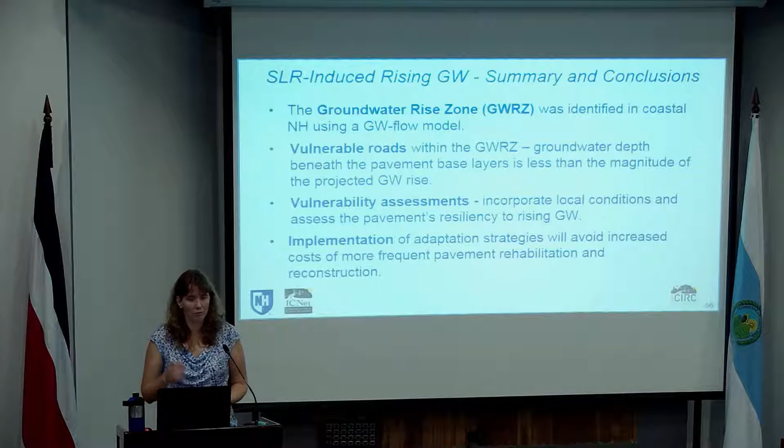So from this part of the study, we were able to identify that groundwater rise zone, identify where we had the vulnerable roads, do a rough vulnerability assessment in terms of what we're expecting in terms of performance, and then look at what are some possible implementable options to adapt.

Now, the next step, and this is some of the work that is currently going on, is recognizing that not only are we going to be dealing with sea level rise, but we've got changing weather conditions on top of that. So looking at some seasonal changes in terms of temperature, as well as those seasonal changes in terms of precipitation that we're expecting, combined with the rising sea level. And then starting to look at it not just on an average basis, but looking at changes over seasons.

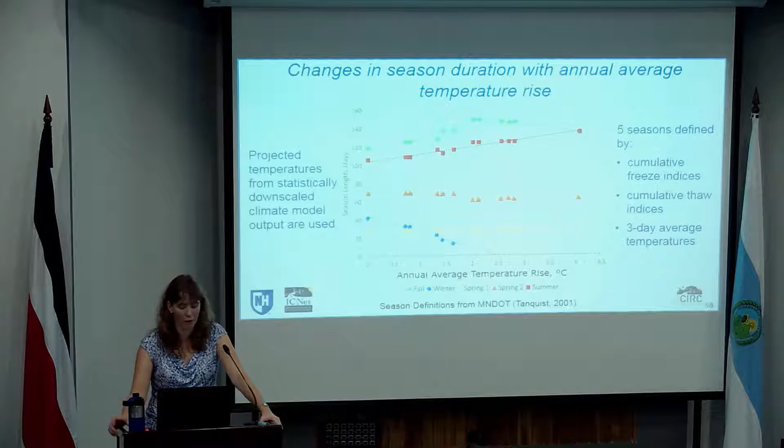One of the first things we did was look at the duration of the season. We used seasonal definitions from work done in Minnesota. Minnesota DOT defines the lengths of certain seasons based on cumulative freezing and thawing indexes from air temperature data. This figure shows the change in the length of the season as a function of annual average temperature rise.

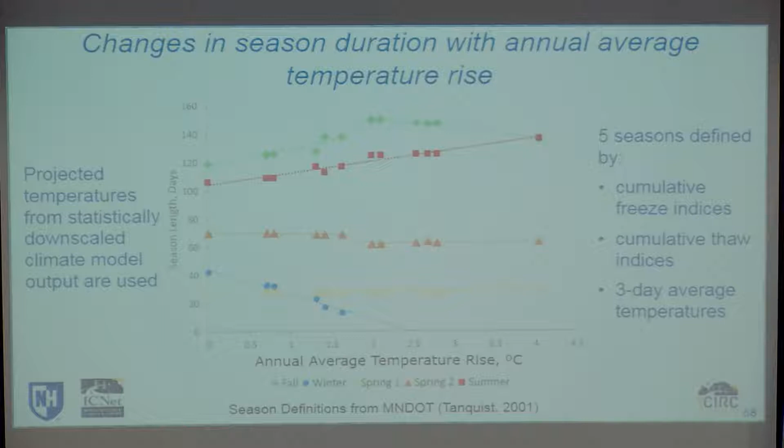We're not tying this to a particular time frame, but to a change in temperature. That gives us flexibility as projections change. In terms of timing, we still have the information—we can just shift it along the axis in terms of where we expect different things to happen.

For the seasons, we've got different colors: green is fall, red is summer. We've got two springs, because we've got a spring before thaw happens in terms of the roadway, and a spring after thaw happens—so we've separated those out. And then we've got winter.

As annual temperatures rise, the length of our winter season decreases, and once we get to 2.5 degrees, winter, as we've defined it, essentially disappears. This has other implications, especially in areas of New England where they rely on frozen roads for logging—it can have significant implications.

Some other interesting things happen: our fall season increases to a certain point, and then once winter disappears, the length of the fall season decreases, because winter is disappearing. Summer season shows continuous increase. With the spring season before the spring thaw, the length isn't really changing—it's shifting in terms of when it's happening during the calendar year, but the actual length of time isn't changing. We are seeing some changes in that thaw period though, not as dramatic as the fall and winter.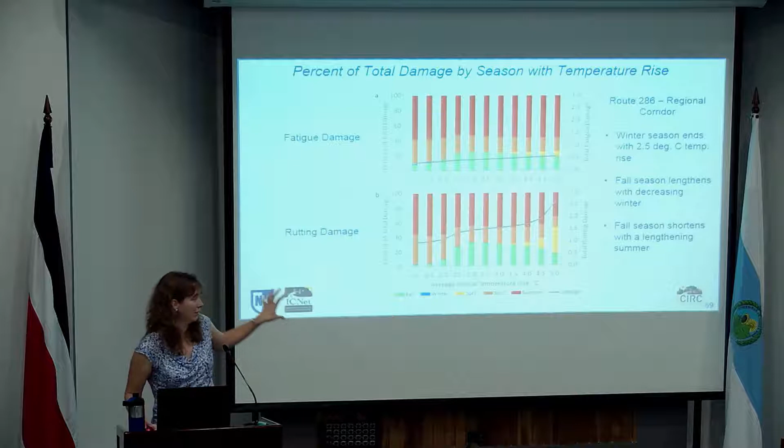But as we're getting these changes in the length of the season, proportionally, using the same colors here, less of that rutting damage is happening during the summer, and we're getting more of it during the fall and the spring. Something to think about. Same with fatigue—it's not changing as much, but you are seeing changes in the relative proportion of when you're getting that damage. This is for a particular case site, using that 286 regional corridor.

Once you've got this information, you can look at how to change those granular base layer thicknesses and the asphalt layer thicknesses. The way this analysis was done is a little different than we did it initially—now we're looking at what are the required thicknesses to maintain a certain level of reliability in our pavement design over time, considering the combined effects of temperature and sea level rise.

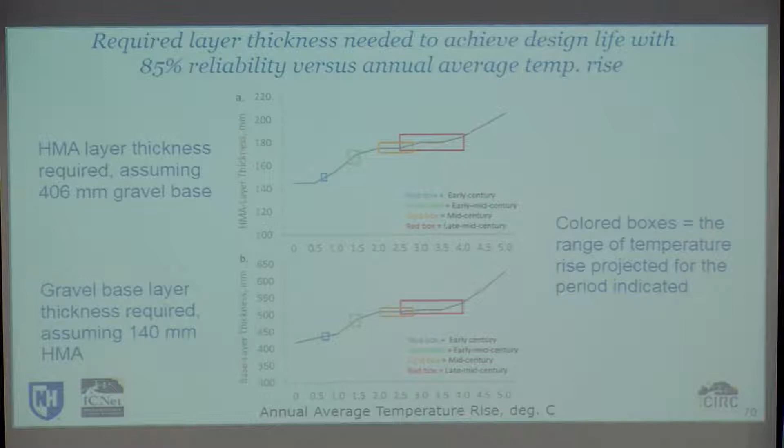This first graph shows the required asphalt layer thickness, assuming a certain thickness of base. In terms of adaptation, all you're doing is adding additional asphalt on top. This is plotted as a function of annual average temperature rise. On top of that, the different boxes show the different scenarios we're looking at for future climate—the blue blocks are early century, what we're expecting in the next 5 to 10 years, all the way up to the red box, which is late to mid-century. The boxes have that width.

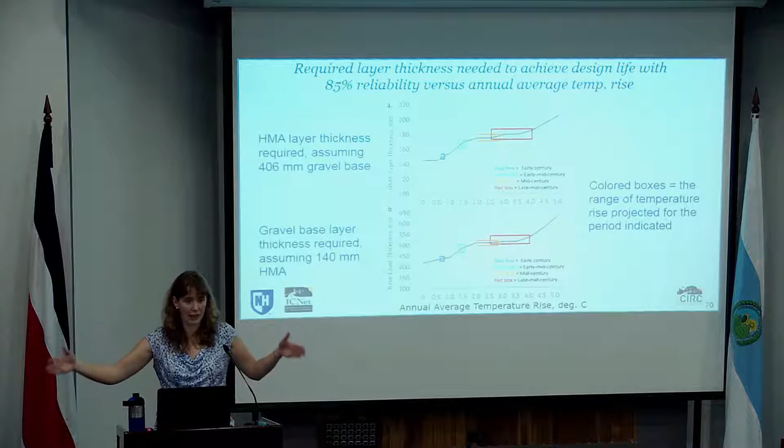You can see they get wider and wider as we get further out because the uncertainty increases. So we've got the variability in terms of the thickness from that uncertainty, and then also the box becomes wider because we don't know exactly where those are going to end up.

On the bottom one, what we've done is we've fixed the asphalt layer thickness and looked at what's the granular base layer that we need. So looking at it from two different perspectives in terms of your adaptation alternatives, you can see how much thicker it needs to be.

So taking all this information, then we're looking at how do we design a framework or an approach to design a climate-ready road to be flexible. We want to make sure it's an approach that can be staged, so you don't necessarily have to take an action now for something that you expect to be a condition 50 years in the future, but making sure that whatever you do now doesn't hinder your ability to further adapt in the future. And again, looking at the combined effects.

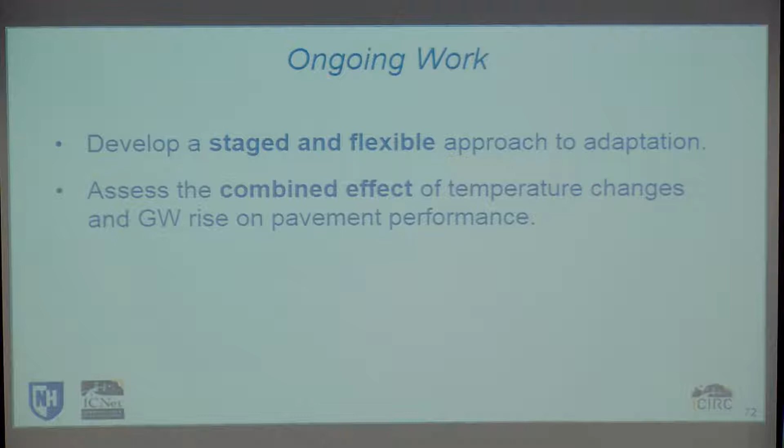So again, just a reminder of what we're looking at. As the groundwater moves into the underlying layers, you've got increase in temperature on top of that. You're expecting more fatigue cracking and more rutting.

So we're looking at developing that framework for coastal road infrastructure, and making sure we're adaptable to those changing conditions. The approach used is a hybrid between two different types of approaches for adaptation, a top-down and a bottom-up approach. We're using a hybrid approach in this study.

So typical bottom-up approach, you've got stakeholders and you're looking at different adaptation alternatives, identifying those different alternatives, doing the analysis, and then identifying which is the optimal one. That's the bottom-up approach.

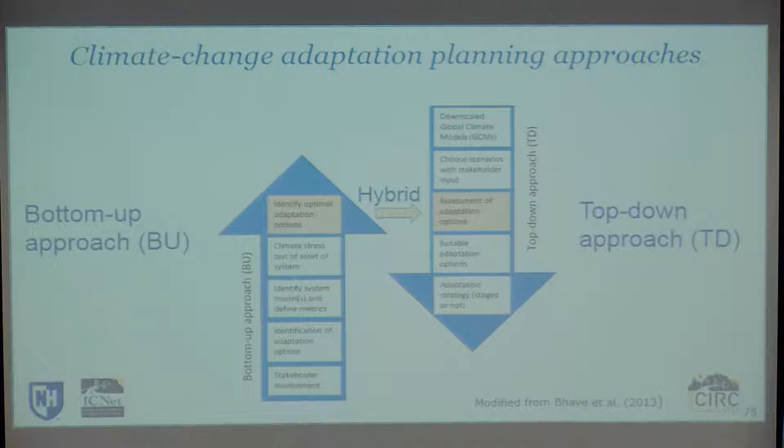The top-down approach, you're looking at what are your future scenarios, and coming from that perspective in terms of choosing the appropriate scenarios to evaluate with some stakeholder input, and then assess your different options. So again, we're combining these two approaches.

So the methodology, first of all, very important to involve stakeholders. It's not just engineers, pavement engineers sitting in a room making decisions. It's involving everybody from the municipal level, decision makers, all in this, because it has to be something that decision makers are on board with.

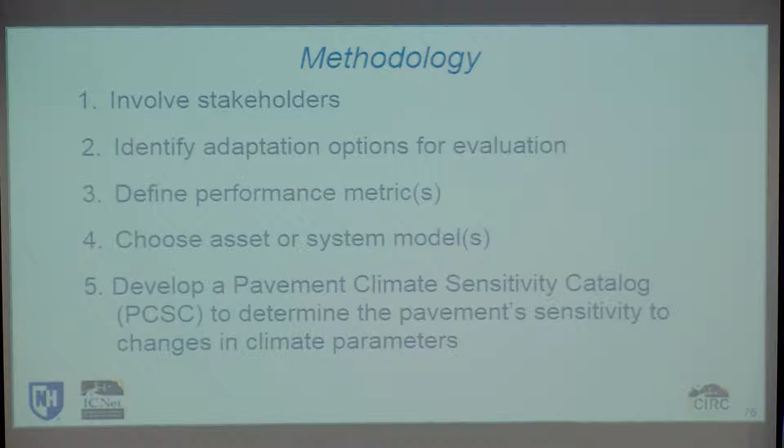Identifying what those adaptation alternatives are, defining what the performance metrics are, and then choosing your models that you're going to use. And then the idea then is to develop what's called a climate sensitivity catalog, so you can see how sensitive your material or your structure is to those different changing parameters.

How sensitive is it to sea level rise? How sensitive is it to temperature change? So this is an example of what a pavement climate sensitivity catalog would look like, for different pavement structures.

In the upper left corner, we've got a fixed gravel base of 406 millimeters. We've got groundwater rise going from 0, no change in groundwater level, up to 0.7 meters. And then on the horizontal axis, we've got the change in temperature, so looking at the combination of temperature change and groundwater change, across 4 different pavement structures.

What these show, the numbers in here, are the required thickness of your asphalt layer to maintain 85% reliability in terms of performance. So this is just showing 4 different cases where we've got 4 different gravel base thicknesses. This one's the relatively thin, 406 millimeters. Down on the lower right, we've got the thicker 711 millimeters.

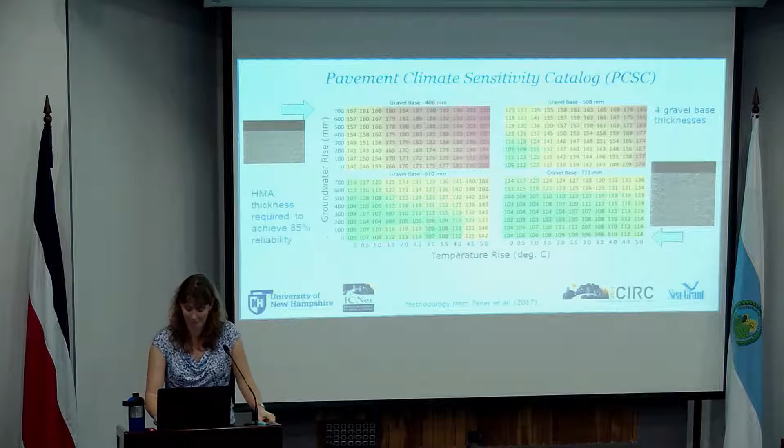So once you've got that information, you know how sensitive your pavement structure is to changes in temperature and groundwater, now we've got an overlay on that. What are the different climate change scenarios you're interested in evaluating? Use that output to figure out the timing of any of those particular combinations of groundwater rise and temperature rise. Once we know the sensitivity, we can figure out the timing and the most likely scenarios potentially to happen, and then figure out our adaptation alternatives.

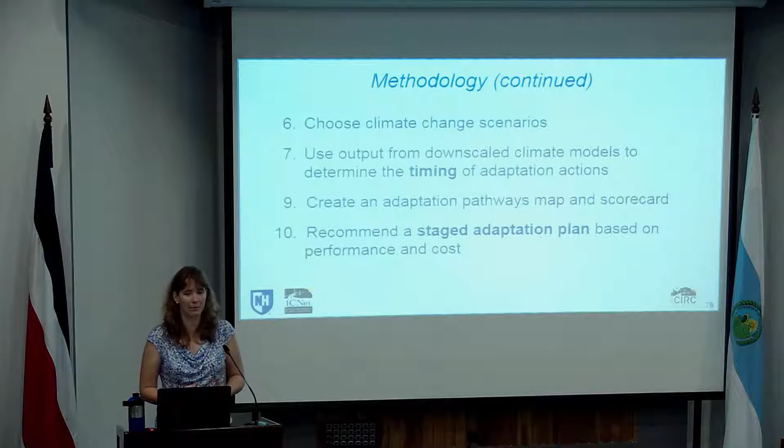You can think about what's called an adaptation pathway - this is the action that should be taken now versus action you should think about in 10 years from now, 20 years from now. You can change different adaptation pathways depending on how things change in the future, because as we get further on, we'll have better estimates, less uncertainty in terms of what we're expecting for future conditions. In that way, you can recommend a staged adaptation plan that allows you to be flexible.

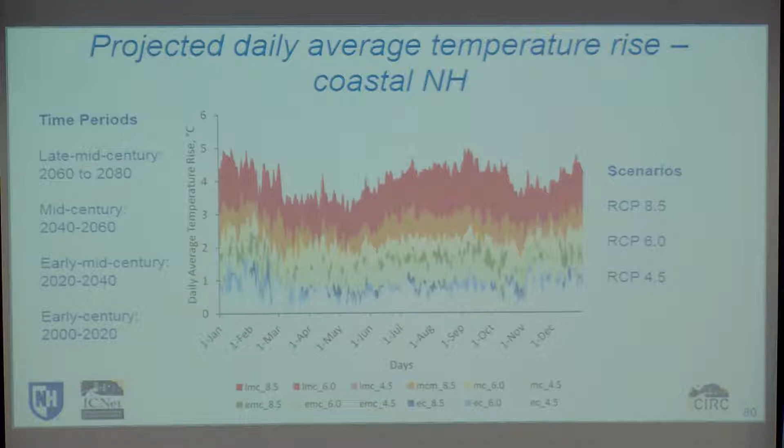So for this particular study, again, several different climate change scenarios that we're looking at. This figure gives you an idea of what those projected average temperatures are going to be - how much we're expecting the temperature to rise, and how that changes through the year for the different scenarios.

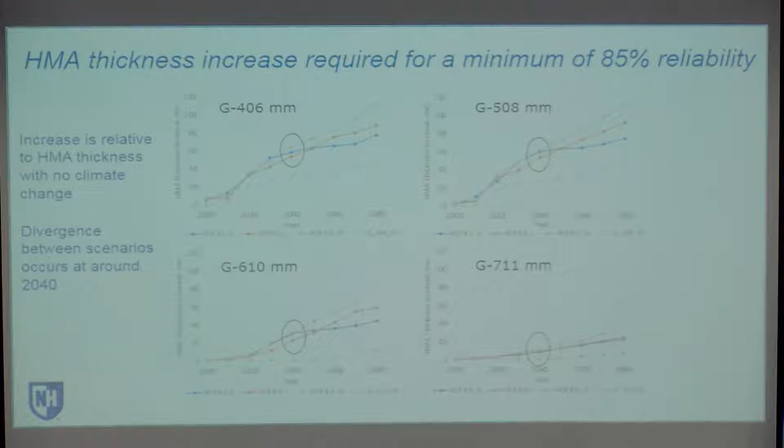All right, now looking at some of the results. We're looking at different gravel base thicknesses to start with, and looking at how that asphalt layer thickness, or the required asphalt layer thickness to maintain 85% reliability, changes as a function of time for the different scenarios. We've got time on the x-axis, and the different lines represent the different climate change scenarios.

What's interesting is that regardless of which gravel base thickness, for the near term it basically doesn't matter which scenario you're looking at - it's giving you the same information in terms of the recommendation for the thickness you need for your asphalt layer. It's not until we get out to about year 2040 that things start to diverge. So really it doesn't matter which scenario you're planning for right now, same recommendation across the board, but as you get out further in time, things start to change.

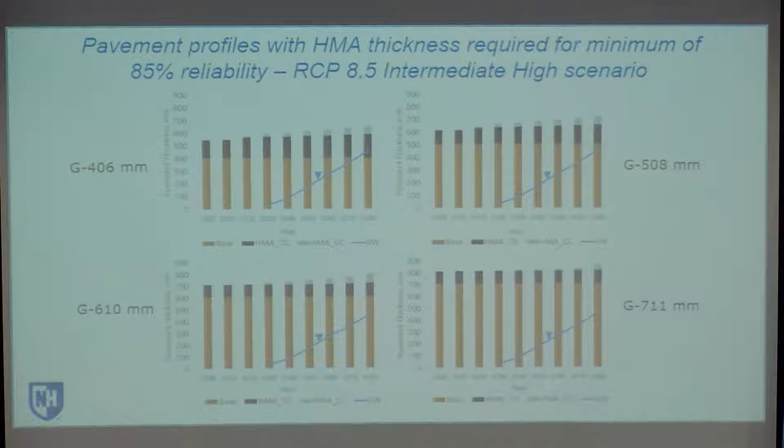This is just a different way of showing some of the similar information in a graphical format, in terms of the thickness of the asphalt layer that you need as we march on in time, and this is showing you how the groundwater table is changing over time. So you can see that at 2040, that's where we really start to see more of the bigger impact from the groundwater rise.

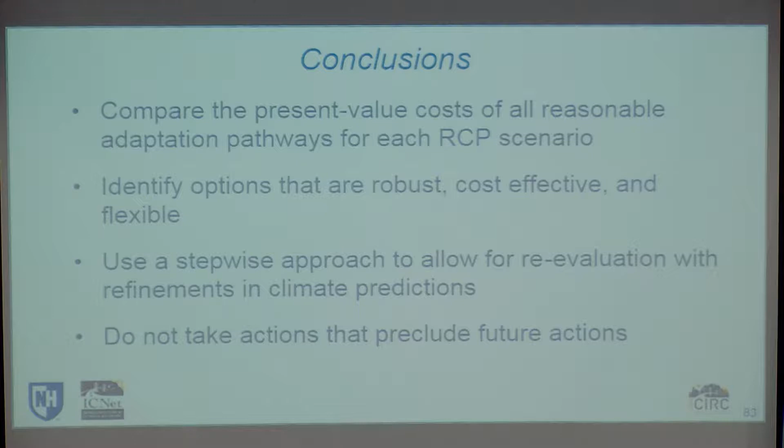All right, getting close to the end. So just some of the conclusions from this work, which is still ongoing, is really looking at comparing present value costs for all of those different reasonable adaptation pathways, for each of the different scenarios, and using that to identify what are the most cost-effective and robust and flexible options to adapt to what we're expecting for changing climate in the future and sea level rise. Using this stepwise approach allows you to reevaluate things over time.

Once that climate sensitivity analysis is done, it doesn't have to be done again - you just have to revise what the time frame is, and that's one of the advantages of this approach. You're not consistently have to redo the analysis. You do that analysis, and then as time goes, you can refine what years are associated with that analysis, knowing that you don't want to take those actions that are going to preclude future actions that could be beneficial.